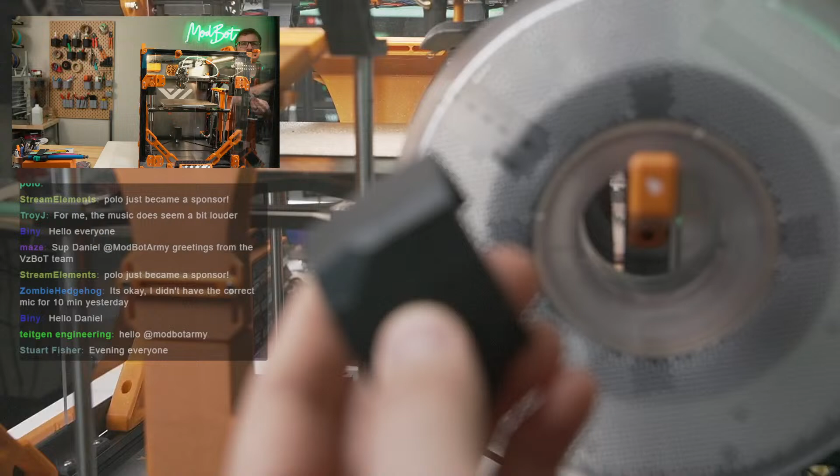Okay, so let's take a look at this. This is the worst model that I could find as far as showing this artifacting that's going on. Let me see how well we can see it. You guys can probably see it pretty bad right there. So I've been printing quite a bit with this VZBot, and a lot of times I don't really see much artifacting, but there's a few models I've printed where it's pretty bad. And this is, for anyone that doesn't know what this is, the Stealthburner, and it's the wing for the Stealthburner. I noticed this when we printed it out for the Trident that we just completed, because this is how the part looks on the Trident. It looks quite bad.

So I had a couple ideas of what it was. I think I've had some weird issues with Orca Slicer and the Arachne wall generator, so that's one thing I want to check. Steve, who is probably still in chat, mentioned also taking a look at Pressure Advance to see if there's something weird going on with it.

So the game plan is we're going to print 2 of these. I'm going to move that off, go ahead and reslice it exactly as is, and we're just going to remove the Arachne and go with classic wall generator and see what that does.

It was lovely meeting Steve Bills. Maybe next Rep Fest. Are you by chance going to any in the States next year? My current plan is still, if all works out, I'm really trying to go to Rocky Mountain and then 3D Printopia. We officially got our closing date for our house, which is super exciting, it's January 30th. So between January 30th and February at some point it's going to be a bit crazy, but we're still going to be here for like 30 days, there's a transition period. I'm hoping we can still maintain streaming on a much smaller scale, but I'll let everybody know as things get closer. We are super excited, it's going to be awesome, the streaming studio area is bigger, it's just going to be so cool.

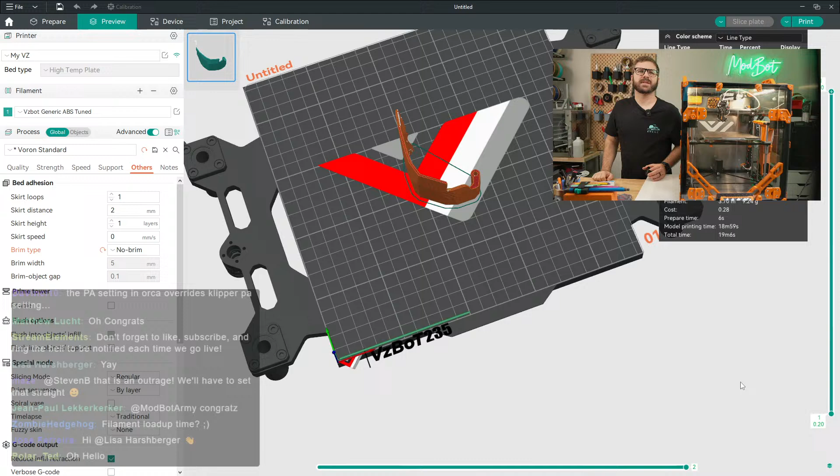Thank you very much, it's going to be super freaking cool, I seriously can't wait. You said, oh cool, okay, so you should be at Rocky Mountain. Awesome.

What does each peak of the artifacting measure? It could be caused by a tooth pulley, or belt tension? I don't think it's belt tension either. It's so consistent that to me it doesn't look like it's something caused by vibrations, because usually you'd see them sort of trail off.

So I don't want to change anything, I just want to change one parameter at a time. We're going to start off with leaving everything as is, but I'm going to change this wall generator from Arachne to classic, and then we're going to reslice it and print it and see what happens.

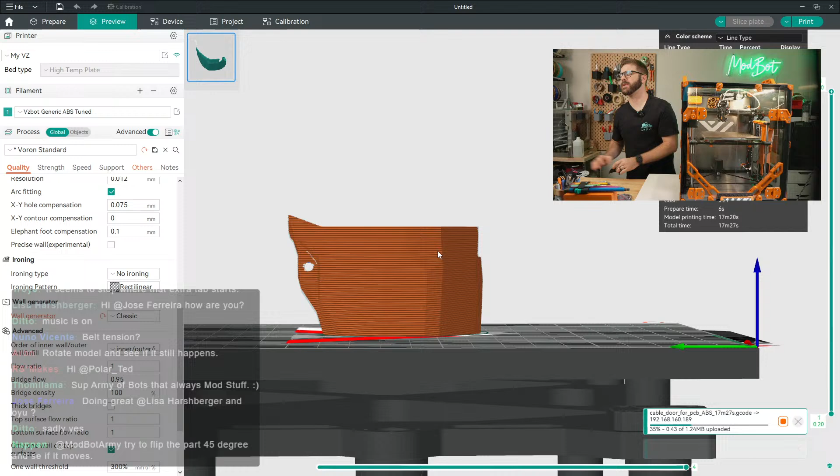And these parts are pretty quick, they're like 17 minutes. So we'll do this, and then we will reset the pressure advance and run a pressure advance test and see if that does it. And if that doesn't do it, then I am truly open to theories and ideas.

Let's see. Do you want to cut off some of that part for testing? That's not a terrible idea, we don't actually need the full thing, huh? Yeah, let's maybe do that. Let me see here, let's see if I can remember how to do it. I don't know if I've actually chopped a part in this slicer, I believe it's just a cut tool?

Support painting, cut, there we go. So I guess in theory, well, God, I can't say that this week because it was setting off people's...

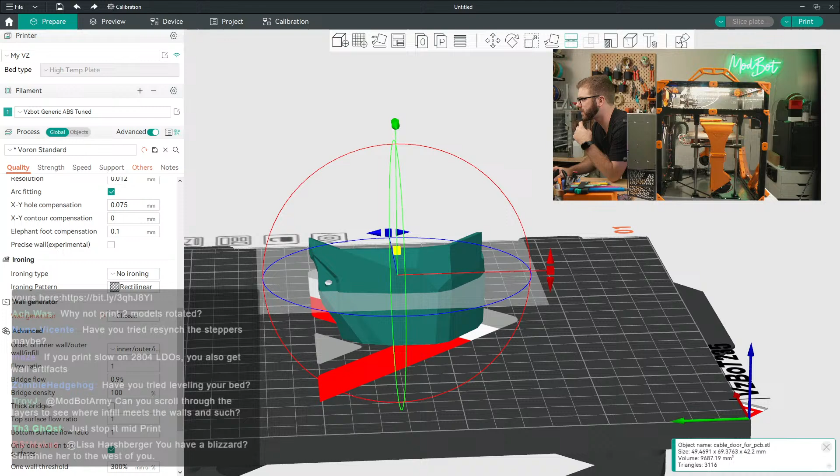Can you scroll down through the layers to where the infill meets the walls and such? There is no infill on this. So based off of where I'm seeing this artifact, half of this is probably plenty, so let's perform cut, let's get rid of the top portion.

Oops. Come on, there we go. Okay cool, that should make it, what, 10 minutes then? Yeah, 11 minutes, so that's faster.

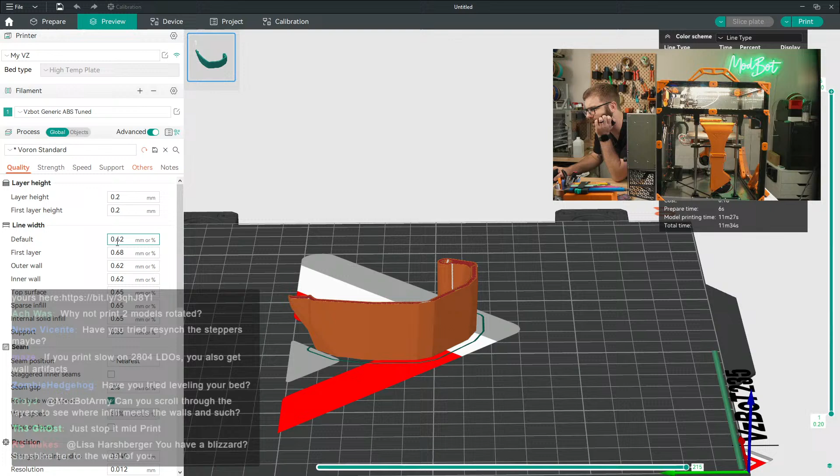Let me also make sure I didn't do anything silly, because we are running a 0.6 nozzle, so that's why the layer lines are wider, 0.62, 0.68, yada yada. Yeah, but there is no, well maybe is there some slight infill? I don't think so, because it's with the Voron settings, so because of how thin this part is, it should be solid walls.

I did try leveling the bed. Why not print 2 models rotated? What do you mean, just to see from a different angle how it looks? Doing well watching a blizzard happening?

Oh my gosh, I need to assemble my pile of Switchwire parts. What did you say? I missed some of these.

Try to flip the part 45 degrees and see if it moves. But the Voron setting is for 0.4. True.

I'm going to end up stopping this print then as soon as it starts here. It should be defaults, Maze. I'll take a look in 1 sec here. Let me see if I go pause.

Have you tried leveling your camera? Thanks, zombie.

Okay, stop, repair, print, upload. So speeds are normal printing's 10K accel, outer walls 5K, inner walls 10K.

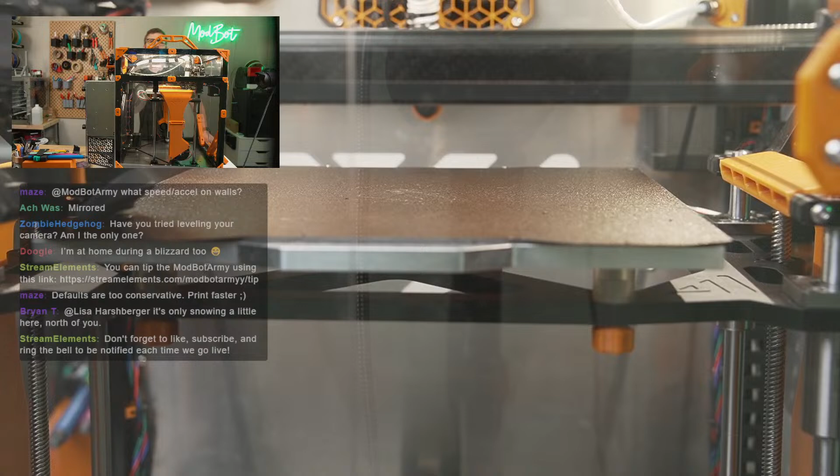If you got most artifacts on a 45, so if you rotate a 45, then it should move if it's mechanical.

I'm at home during a blizzard too.

The Orca Slicer profile was a contribution from one of our users. The speed accels in there are way too conservative. Like moderate accel for all-wheel drive should be 25. No shit.

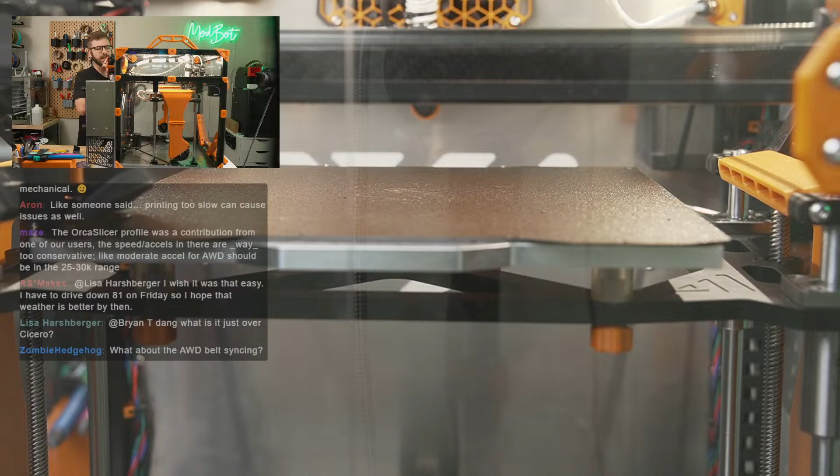I'm fine with bumping it. Let's just, for my own self, because I've had some weird stuff happen with Arachne. On my V0, when I was printing out the Voron test cube, I kept having this sort of strange hole in the wall, and it ended up being related to Arachne. So I just want to rule this out.

Yeah, one change at a time. So let's see, this is just a half print, it's a quick 10 minutes, and if it's not looking substantially better, then we can try something else out.

I probably should have done a... Ooh, that skipped a step. That immediately skipped a step.

And that's funny because I just talked to Steve about this. I haven't had any issues with skipped steps on this. It like immediately skipped a step.

Ah! I did the wrong way. That's interesting.

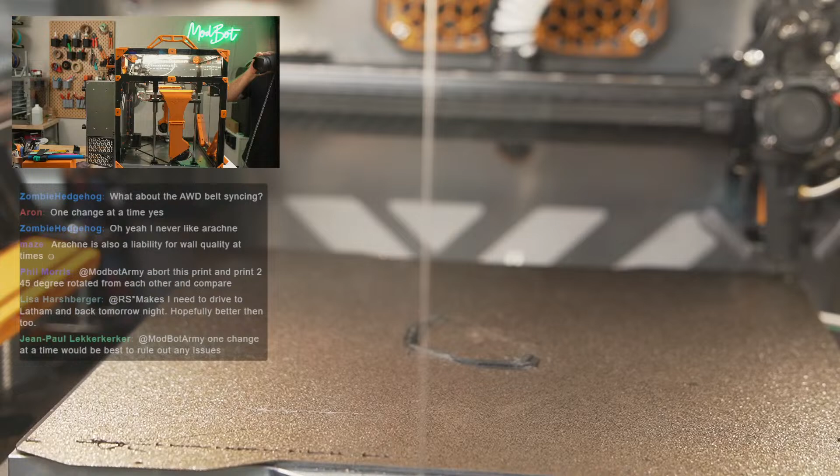I don't think it's too close to the bed. It's been the same settings for quite a long time, and it does preheat before it does the...

I am kind of curious though if we rotate the parts like someone mentioned, so print 2 of them at the same time.

Yeah, I printed quite a few parts on this printer, like for the 2.4, the Trident builds, and I have not had a skipped step. It's kind of funny because I was just talking to Steve about the settings for the stepper drivers just the other day because of skip steps, and then it skips a step.

That was not a benchy. It was not a benchy. Okay, I'm gonna try it actually. I lied, I'm gonna try it one more time just with a single one.

I'm not against rotating the part after, but I just want to see. I just want to see if I jinxed it, yeah, Steve.

Yeah, it hasn't even been like 48 hours. I think the VZBot heard us talking about it.

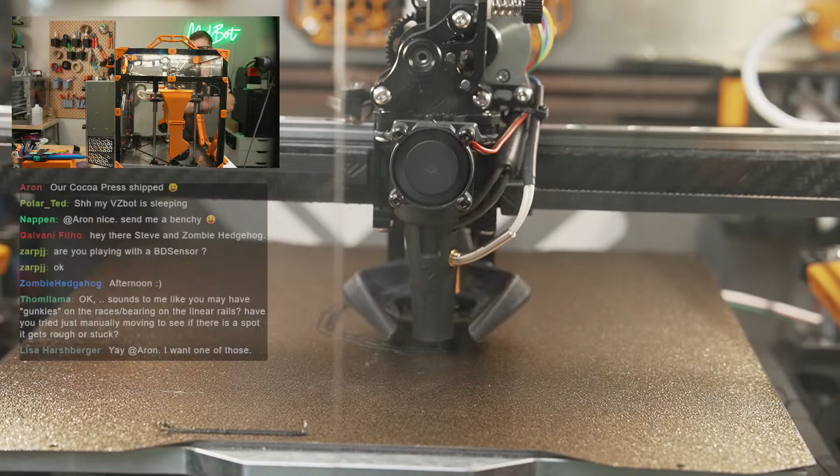Okay, well, it got beyond. It got me on the part where it skipped a second ago, so that's good.

It sounds to me like you have gunkies on the races bearings on the linear rails. Have you tried just manually moving them to see if the spot gets stuck? Yeah, yep.

Yeah, there's gonna be an ad in 10 minutes. The thing I just clicked, I thought it was gonna turn off ads, but it looks like it set a 10-minute timer instead. So there will be an ad in 10 minutes, sorry.

Yeah, they changed some stuff recently, but I thought it was for VODs, for after a stream was done. I don't think it would have done that, I think if you have premium you're not gonna get ads. I'm hoping they add a gifted membership, like Twitch has a Prime membership, like a premium membership, but they will not allow creators to stop ads.

And I would say it's not - let's see. I would say it's not because of Arachne versus Classic. If you compare up here to there, I would say that looks identical. So we can rule out that it's the wall generator.

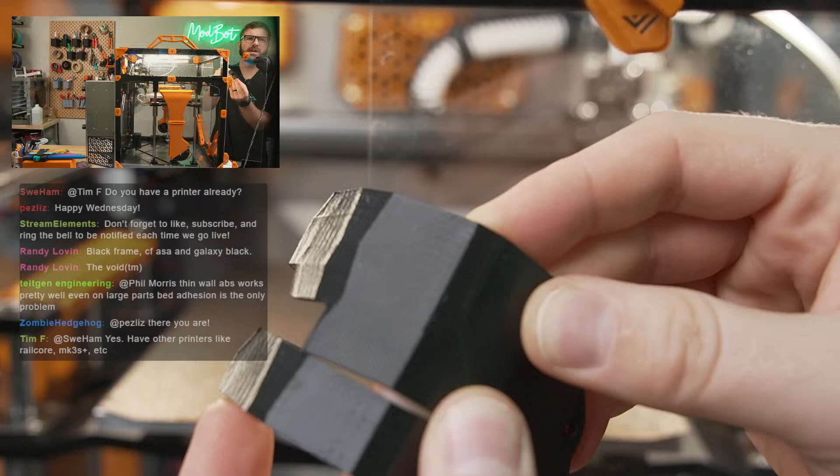Okay, so we're going to, let me close this to not let all of our hot air out. Pull this off.

Is it possible it's from the extruder gears? No, I don't think it would be the extruder gears. At least I don't see it. That's not what I think it is.

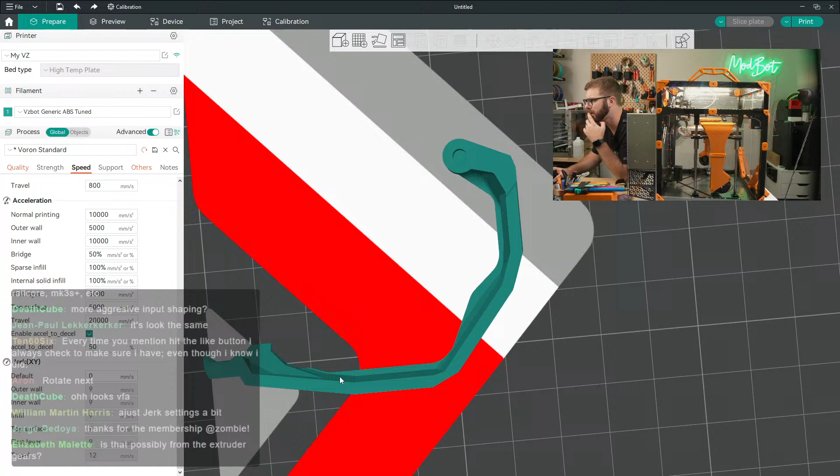Okay, so let's take this part and just flip it around. This is the front of the printer. Let's do a little rotate. Nope, that's not what I want to do. Rotate, and we'll do...

Do 180 or 45? 180 might put us... 45 is probably best. Actually, okay, let's go back to where we were a second ago.

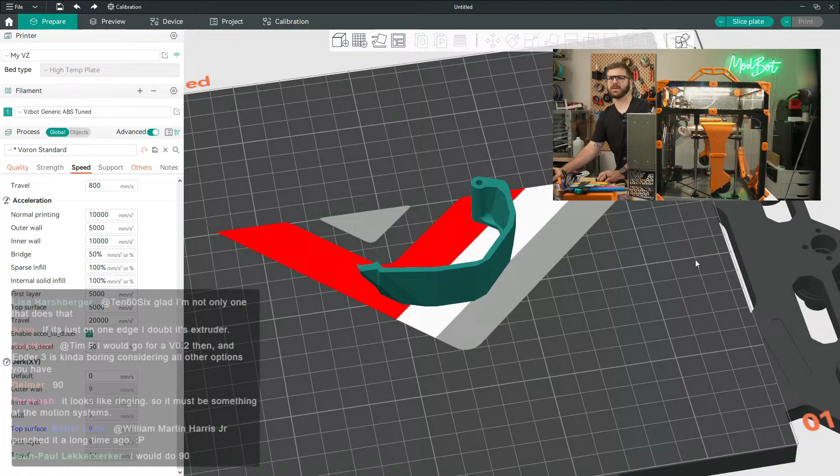Control Z. You think 90? It looks like ringing, so it must be something with the motion system. I would do 90. Yeah, let's try 90.

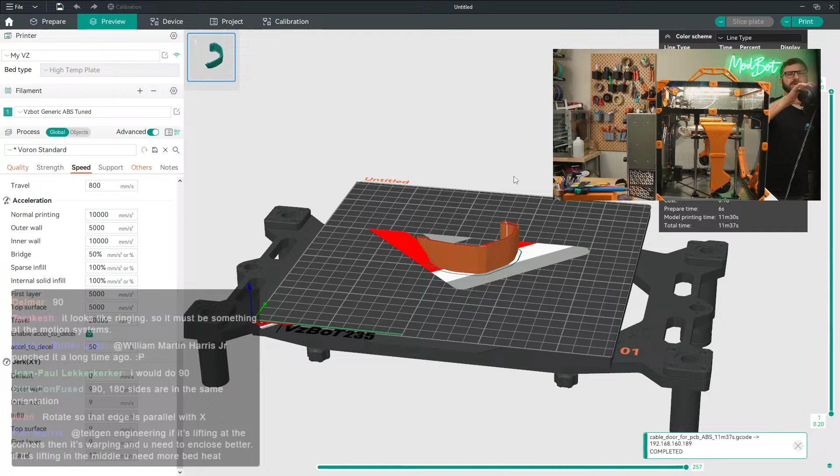We could certainly play around with input shaping. So I know that when Steve and I ran it, let's get this printing. When Steve and I ran the input shaping, we were told that because of the rigidity of this machine and the accelerations it hit, the default input shaping test wouldn't hit the max it could. So I never reran it. That being said, Steve's not having these issues, so I'm not entirely convinced that's the issue, but I'm fine with running input shaping again to see if that does anything.

The edge with the issue was at a 45-degree prior. The edge with the issue is this edge. Yeah, it was at 45 degrees, so 90 is probably not good.

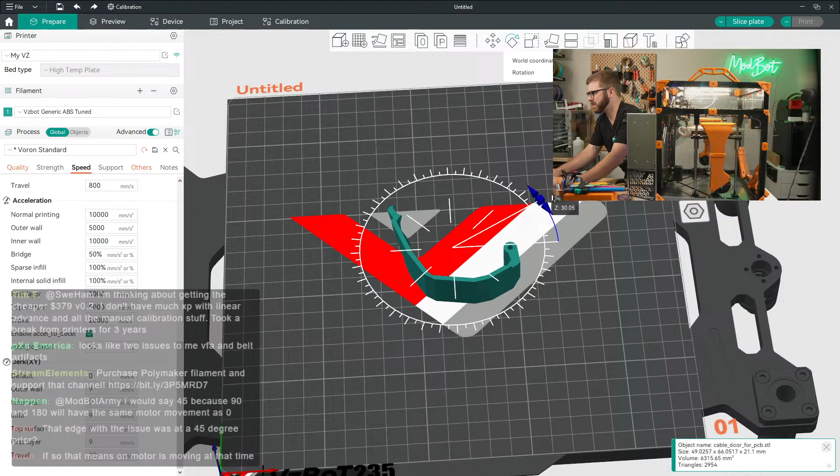Yeah, Aaron, I think you're right. All right, so this is how it was before, and this is the main piece where we're seeing the issue. So let's manually rotate it and try to get it as parallel to X as possible.

That's pretty close. So if all of a sudden this is looking a lot better and this is looking a lot worse, then... yeah. I've only printed carbon fiber filament on the VZBot so far, so...

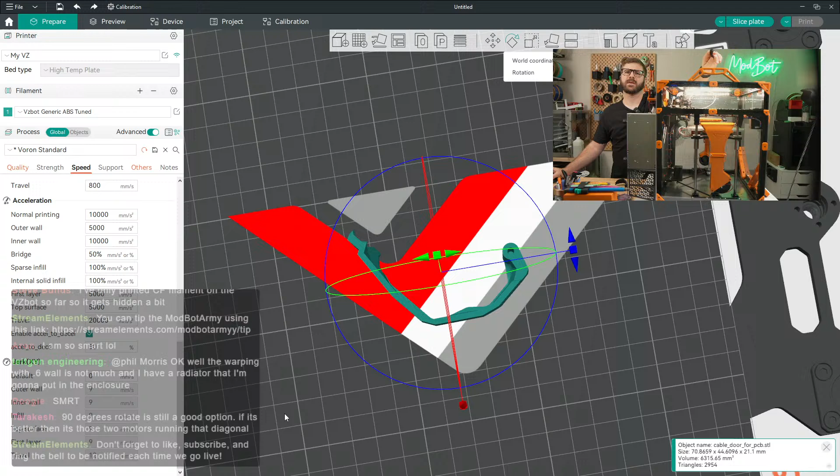Okay, so let's try this, see how this looks.

So in your... I believe what Maze is saying is also true. Gotcha, okay, so let's see what happens here, Maze, and if you're thinking we need to bump the accels, we can bump accels and see if that does it as well.

Belts are bouncing? I don't know what you mean.

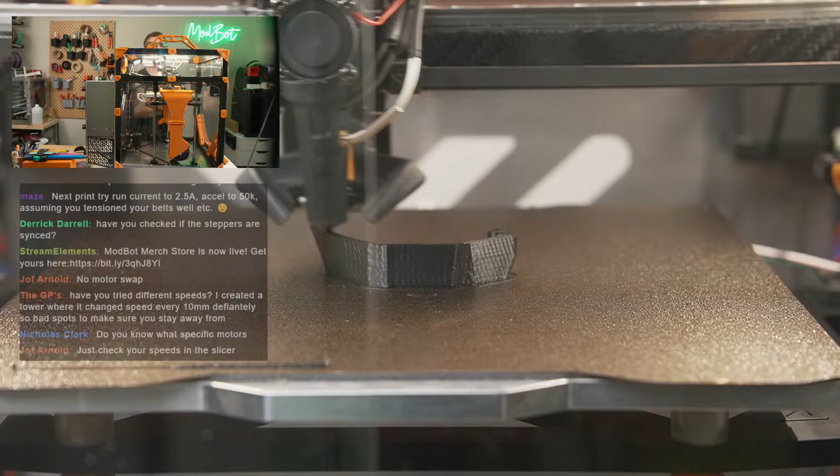Yeah, I'm gonna go with what Maze says. Maze knows this printer like the back of his hand, so we'll try that and see if we see any improvements.

Okay, let's stop the print. It's probably almost done, but we'll get it. Device pause. Okay, so print stopped.

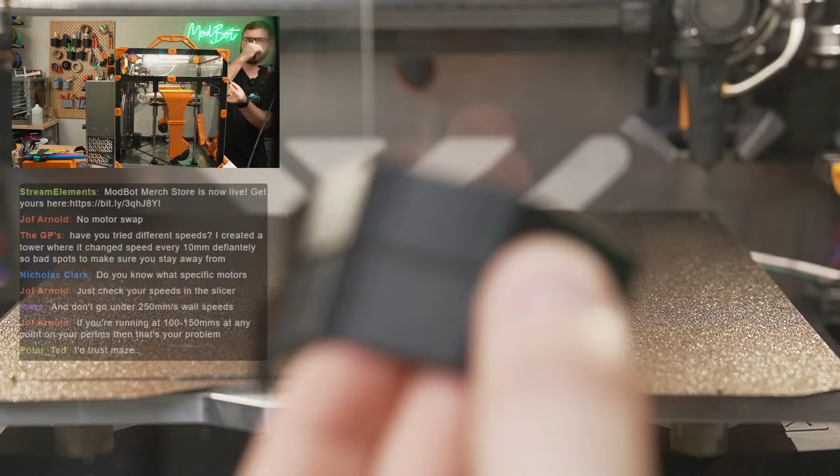Definitely shifted. So let me see if you guys can see this. This is the one I just got off the printer on top, and it certainly changed the pattern. There's still a pattern, but it slightly changed, not a whole lot. I guess the pattern's still really there.

So let's do this next thing and see how that does. Okay, so Maze is saying, what do I have it capped at in firmware?

Max accel is capped at 10K in firmware. Interesting. Accel to 50K, alright, we're gonna try it.

Save and close. Oh wait, you said printer CFG. So you're saying to change the current to 2.5 amps? So we are at 1.9, we'll go to 2.5.

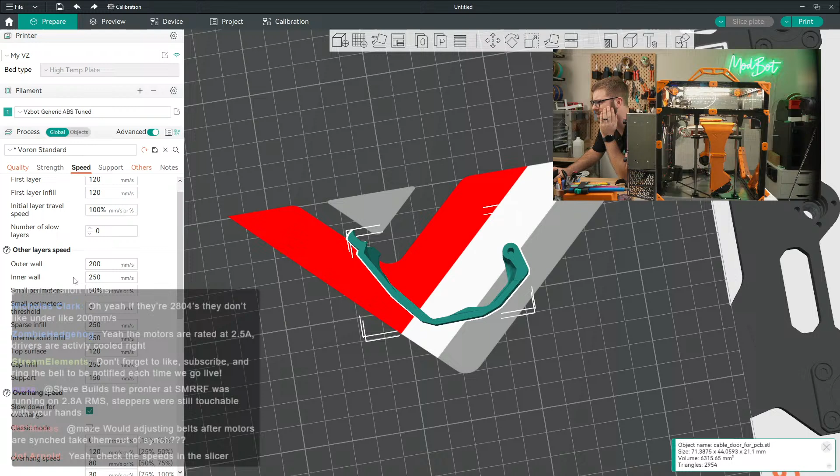Okay, speeds in the slicer. So we've got, where are we at? Outer wall 200, inner wall 250. So what are you thinking we should set this to?

You thinking 50k for everything other than first layer, or? I mean, check the sliced view, slice, then select speed from the drop down. Oh, you're saying what it's actually hitting. Gotcha. Preview, line type, speed.

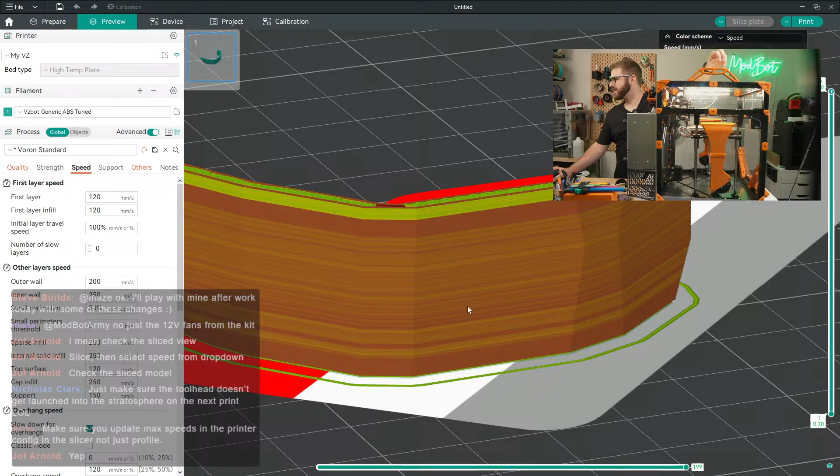So anywhere between, why is there - that's interesting to me that some direction on the outer wall shows slower speeds while some shows quicker speeds.

Hey Sven, hey Jof, make sure you update max speeds in the printer config. Yeah, yep. Wait, make sure you update max speeds in the printer config, not just- gotcha.

Oh, minimum layer time could be it. Let's see, so let's go to max volumetric.

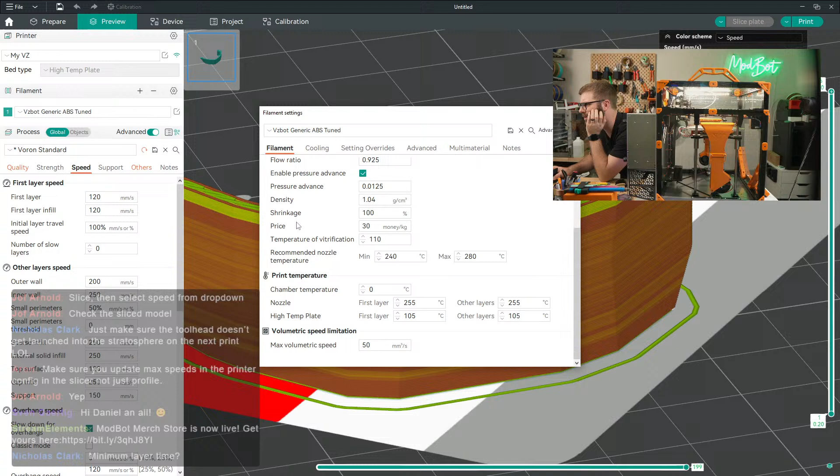50k accel, you can slow down a bit on the outer walls, 250 wall speed. You're saying 50k across the board? Also, I don't know...

Edit my VZ. Oh, I didn't, no. Printable area, motion ability, maximum X speed, Y speed, max accel X 50k, 50k. It looks like it's already set to 50k in the slicer by default, so I think we're good there.

Okay, gotta head back to work. Looking forward to hearing how the rest of this goes. You and me both, Steve.

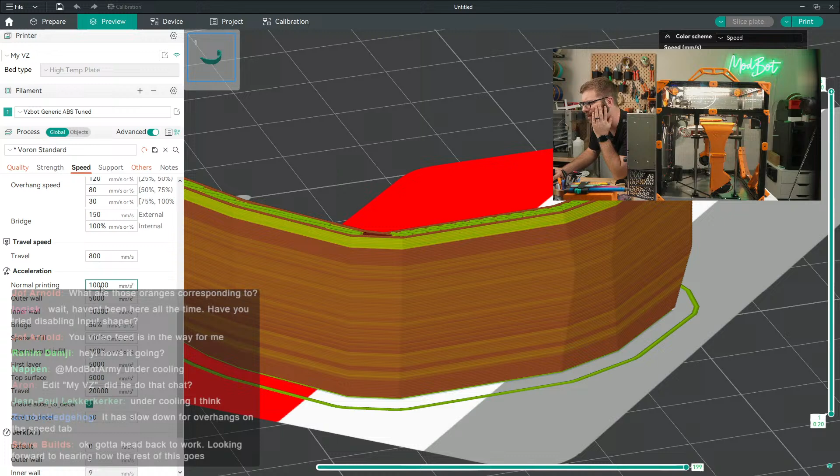It'll just slow down for overhangs speed, Steve. Okay, let's do one thing at a time, so let's do 50k. Are you thinking 50k for everything?

Orange looks like it's... so orange is faster than yellow as far as if we're going by color. Oops, shit, I didn't mean to do that. Orange was about 170. Perhaps run a test speed on those settings prior to printing, or just ace it.

Yeah, I'm tempted to not go quite so fast right then. Like, should we start with just doubling things? So normal printing 20k, outer wall 10k, inner wall 20k.

I don't know if I want to just full send it without slowly ramping up. 300mm outer wall. Yeah, let's— it's a quick one. Let's do this, let's just double things.

20K, 20K, first layer 10K. I'm fine with first layer being like that, top layer as well I'm fine with. 50 flat, 25K outer wall? Really? Okay, I'm gonna meet you in the middle, we'll do 30K and we'll do 15K.

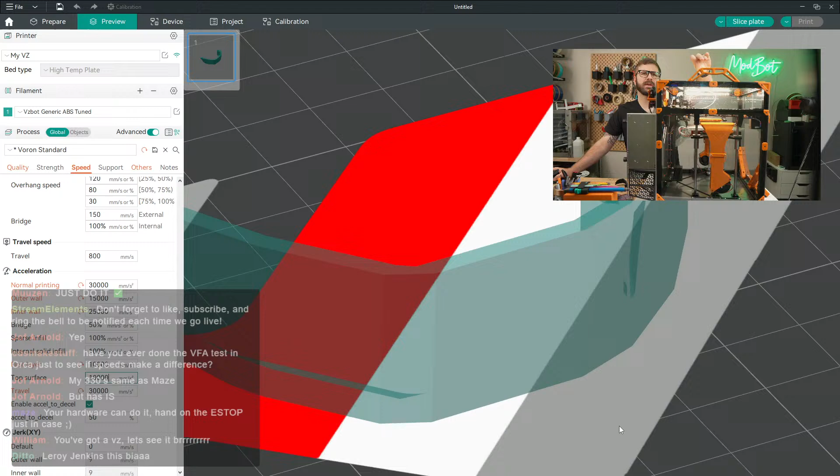My 330 is same as Maze's, but it has input shaper. Hardware can do it. Hand on the e-stop just in case. Okay.

Speed-wise, you're saying I'm fine with first layer, let's not touch. Outer wall, what should we try, 250s or 300? My palms are all getting sweaty. Is your speed—I haven't got anywhere near this before. I mean, we built this to do stuff like this. 250 outer wall, okay. 250 outer, and then you said 300 for the rest?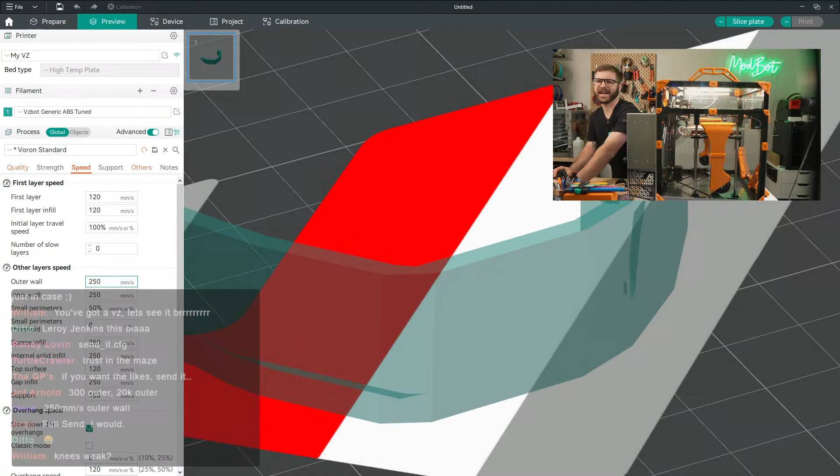This is a— geez, I can't talk. 235. I'm going with what Maze says mostly.

300 to 500 rest, whatever you feel comfortable with, buddy. Okay, all right, all right. You said outer there, so we'll do 350. We'll bump things up to 350. Sparse infill 350, 350, 350. Support we're leaving. Gap infill will bump up as well, and top surface will leave. Top surface will bump up to 200 at least.

Just double what Maze says. He's probably being conservative. Okay.

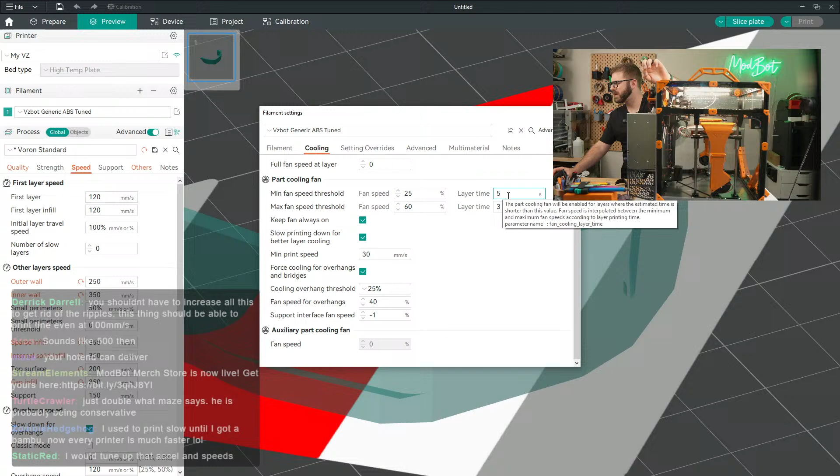The other thing, we probably need to do some stuff with cooling, right? Because cooling is going to be our limiting factor. This is going to be under here. Cooling—no cooling for first layers, full speed at later layers. Okay, minimum fan threshold 25%. Does 0 disable it? 0 disables it, right?

I would tune up the acceleration and speeds. Or we can just drop it down with 3-second layer times and 1-second layer times and see if that does it. I mean, that will boost us.

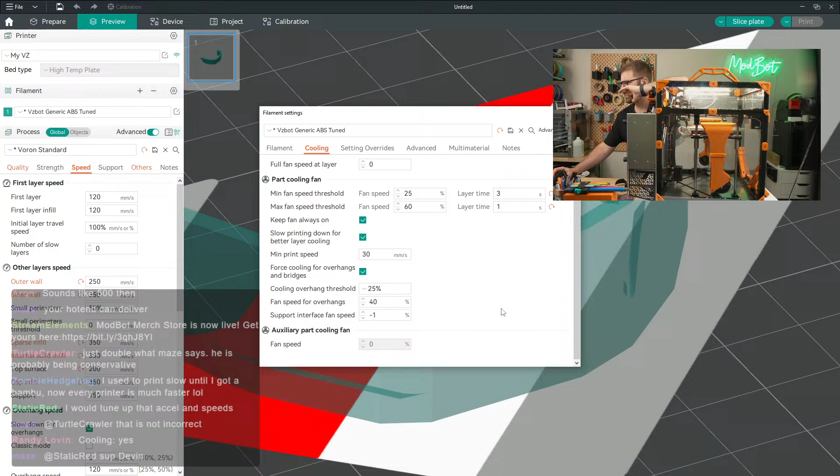Yeah, this is definitely faster. The outside wall is solid, which is good. We've got a single color, which I don't know if whatever it was doing before with the cooling down potentially was having an effect on it. If it goes wrong, we'll know what your next stream will be named.

Print time—yeah, let's just do it. What's the speed, or what's the time going to take on this? 7 minutes and 34 seconds. All right.

Mouse is on the emergency stop button. Whew.

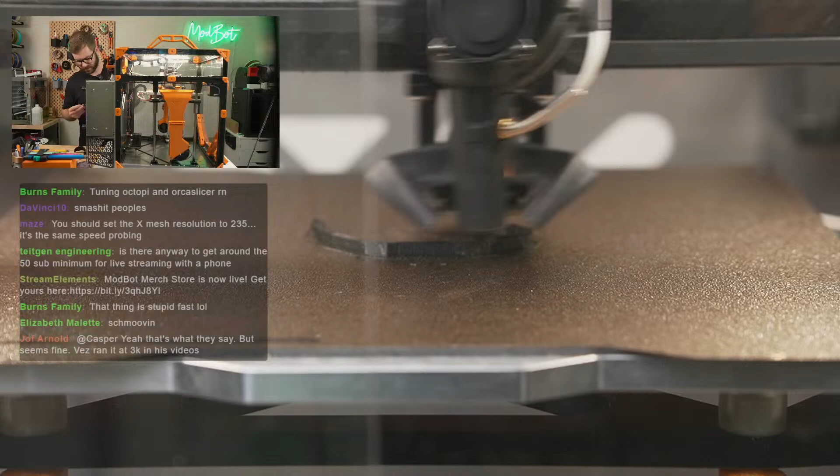It'll be interesting to compare this and see if there's improvements. You think speed it up? All right, I'll go 150. I'll go 150, Maze. All right. This is 150%, it still feels like it's got more to go. We'll go 200%.

God, the travel speed is gross. You can't even really—I mean, it moves so fast that it just almost teleports. The flow rate is—where are we, flow rate? 33 to, roughly, a lot of it's around 40 cubic millimeters a second. It's dropping between like low 30s and 50, but average is around 40, cubic.

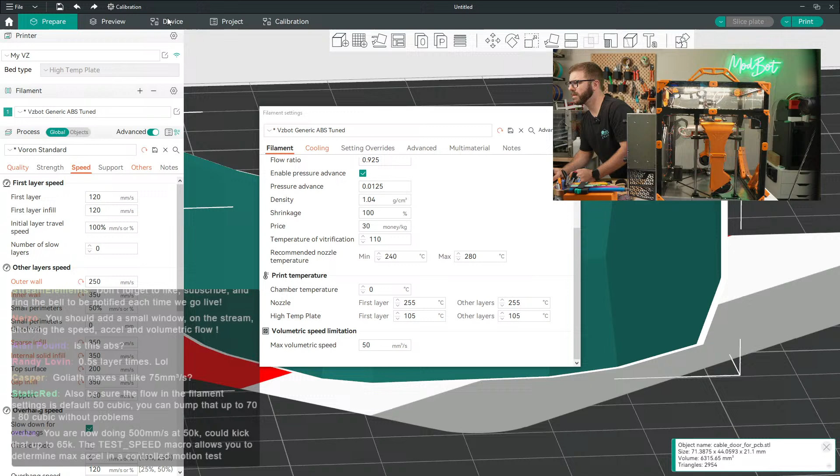Modbot, mind sharing the mainsail screen for a moment? Yeah, sure. Device, oops, nope. I don't know how well you can see that.

You are now doing 500 millimeters a second at 50K. Could kick that up to 65K. I'm not doing 50K, Maze, I never set it to 50. It's at 30K right now.

As far as I'm aware it won't go past. Or wait, no, I think when you adjust speed factor, it doesn't adjust your accels that you set in slicer, right? I think it overrides it. I'm pretty sure slicer overrides it. No, not slicer in browser. Browser in slicer with Orca. Yeah, speed multiplier doesn't affect accels.

So do you think we should bump accels? Okay, so let's compare.

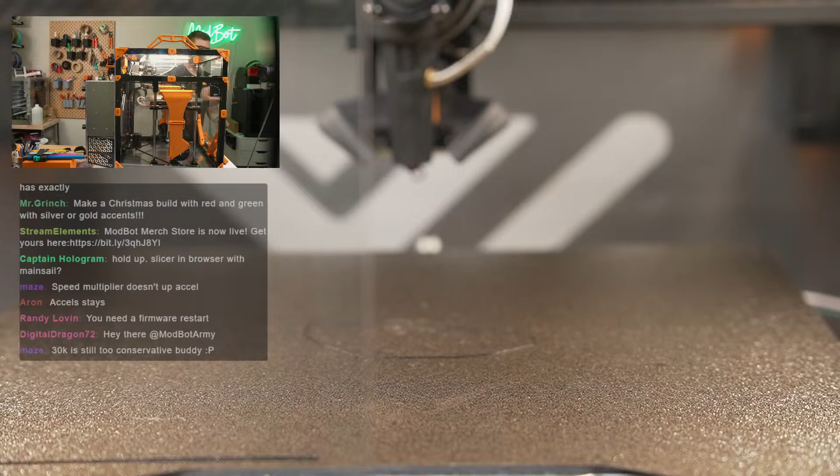Okay, so top is from before, bottom is from after. Definitely still there, it's moved around a bit, but it's still relatively similar.

Okay, we'll bump it up. I wanted to baby step it, not go crazy. We'll do 50, we're doing 50K accel now.

Okay, isn't the max accel 10K? No, wait a minute. No, I don't think so, I had restarted it. It should be set... printer.cfg, I thought I bumped it. Yeah, I did, I bumped it to 50K. So it's not a firmware limitation, it's a slicer limitation, and it's down here. So normal printing will bump to... the outer wall was actually only at 15K, Maze.

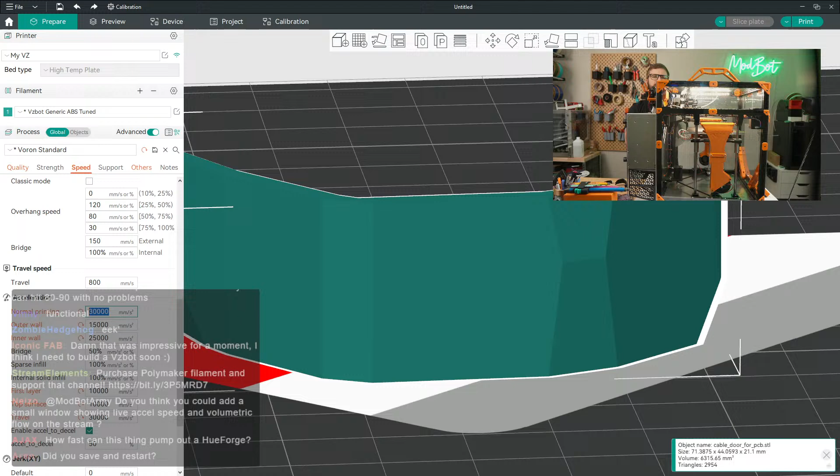Do you think you can add a small window showing live accels and speeds? I probably can, I don't think I can do it right now. Did you save and restart? I think I did, Aron. We can, well, let's do it. Let's restart the printer just to be sure, let's do a firmware restart, and make sure it's still good.

Yeah, we're good, we're good on the accels. I think I saw it in mainsail also bumping up faster. So let's do, for normal we'll do 50 for that. But this is pretty much all outer walls, so we'll bump outer walls to 30, inner walls to 35, and then want this to 20.

20. I'm scared for Beacon, dude, at those travel speeds. That's how I display on live streams.

Load mainsail in OBS as a browser source. Oh, that's not a bad idea. Okay. Let's see, oh, it's a browser source. That's not a bad idea. Okay, yeah, if we want, I could take a minute and do that.

One sec, hey BBs. Hi, we're doing crazy stuff. Yeah. What? Okay, with a little ice and a little cream. Thank you.

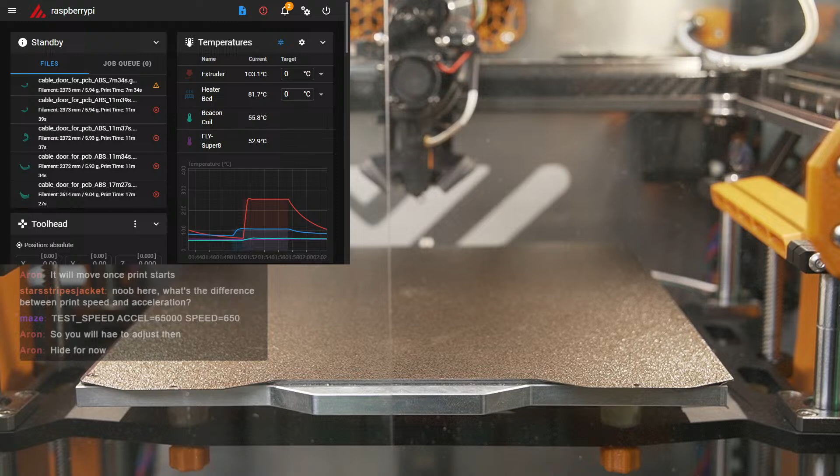It will move once the print starts, so you'll have to adjust. Let me just set this to 1920 by 1080 so it's correct. What are you guys seeing right now? You're seeing mainsail, right?

I don't remember, is this crop or is it going to shrink the whole window size? Nope, it's shrinking the whole window. Impact, screen share, full screen property, show transition, scale filtering. Why can't I see crop? Transform, that's gotta be it, right? Edit, transform. Nope. Can you not crop with bars? Do you have to crop using this box? Hold Alt and drag top to bottom, sides close.

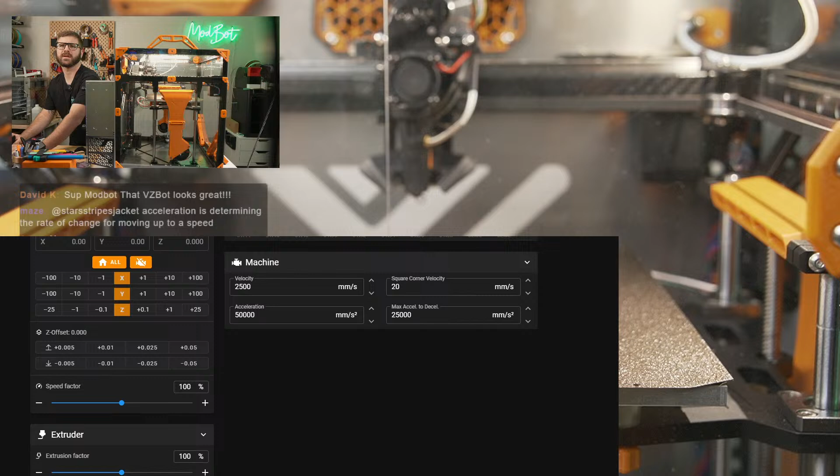Oh, sick, okay. So you guys want to see roughly this? Maybe up here?

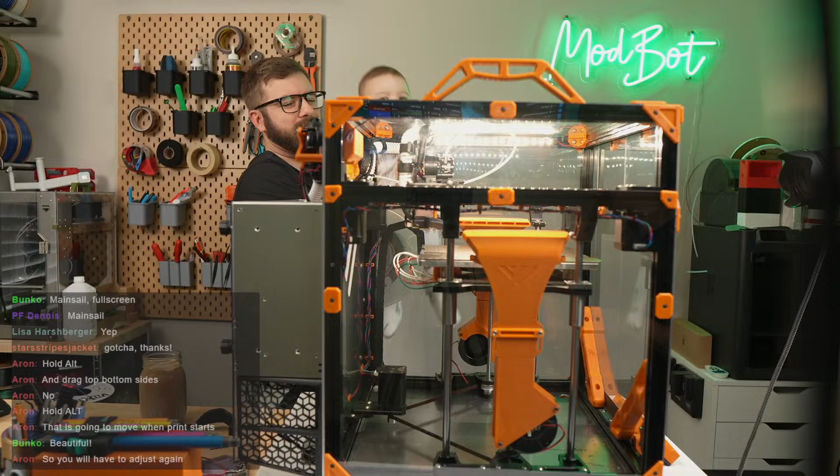Okay, let's get this print going. Hi, all right, Jack's gonna give us good luck. We're taking a quick Jack break, he's gonna give us good luck with our VZ. Come here, dude. Can you? Oh whoa, he likes watching the 3D printers.

Hold on, all right, so we are going at really quick speeds today, and we need you to wish us good luck please. We're basically trying to get rid of, if you didn't see it, this artifacting, and we're trying to figure out how to get rid of it. We've tried a slicer setting, and now we're just cranking up speeds to see if it has something to do with the driver and the motors.

Hold on, Jack says hi. He's hidden behind the VZBot. Yeah, it's a pretty big printer, huh? Yeah, okay, I love you dude.

Okay, let's do this. Sorry, yeah, he's 9.5 months. We'll have his official 9-month checkup Monday, but he was 9 months on the 5th. It's gonna be really interesting to see how tall and how heavy he is, because he feels really heavy.

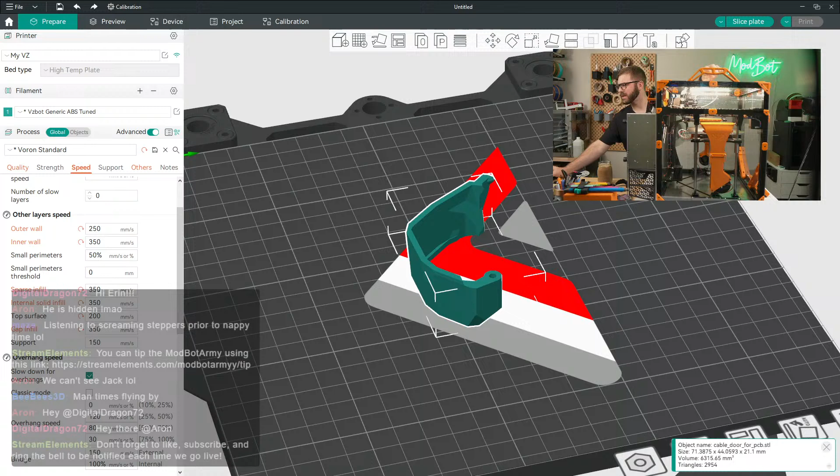Okay, wish us luck. We're gonna go fast. So Maze, I adjusted all of the accels. You thinking keep the layer speeds? Yeah, let's keep layer speeds the same. Let's run with this, I'm gonna have my hand on the emergency stop.

You can watch, you should watch it a sec when it goes on. I know you see it from out there, but it's pretty crazy. Hold on, all right, here we go. Do I need to adjust cropping, or can you see? I think I need to adjust the cropping, don't I?

Try this macro, test speed, accel. Is the test speed macro what basically has the tool head go to the center and then do the perimeter and X pattern? Yeah, it's been that long, Ted. It's been that long, man.

Is Bambu one of the best 3D printers to get starting out? It totally depends on your goals. Well, what did people want to see? Did they want to see the accels, or... it helps you in validating max accels.

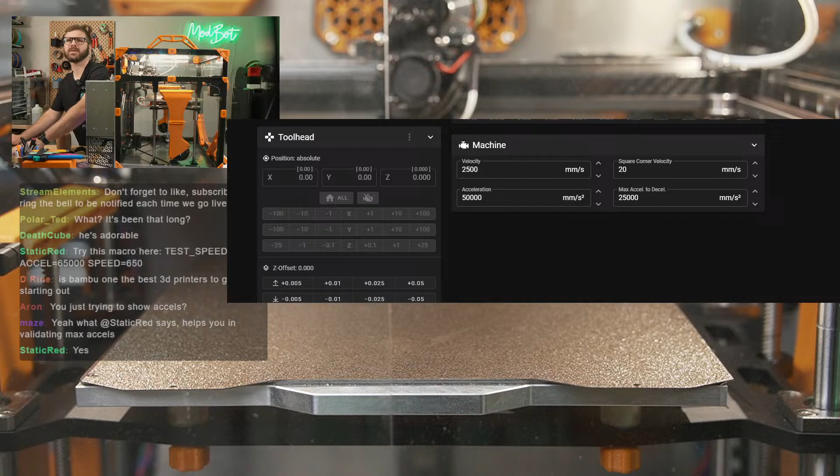Okay, let me see if I go. I wouldn't get him so close just in case - it's moving fast, the tool head, and it's metal, like just in case.

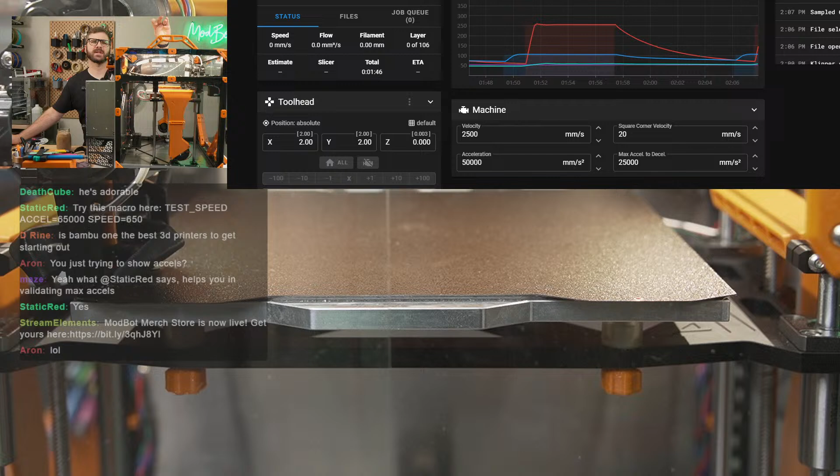If test speed goes fine, you can be relatively certain that it will hit those speeds during printing, as it's single motor stress testing, diagonal moves. Gotcha, okay. I have not used test speed. I'm sure I'll start using it when testing things out.

I might need to move this around a little bit. Also, let me try to be a little bit more... oops, that's not what I wanted to do. That is what I wanted to do.

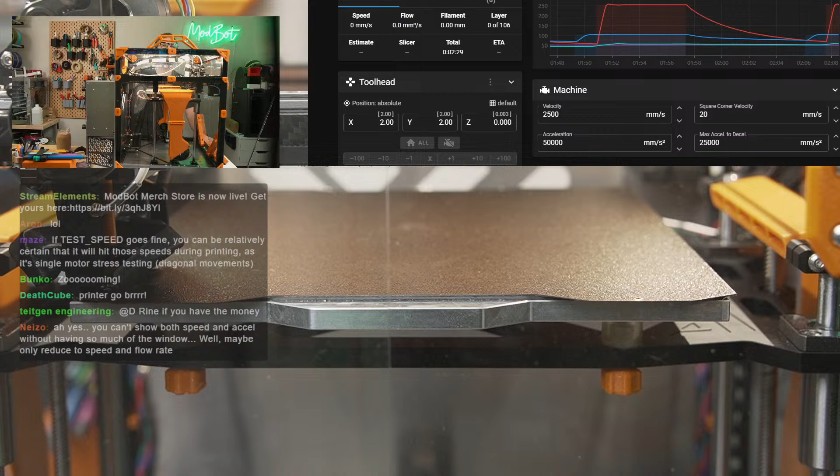How's that, does that work? Oh yes, you can't show both speeds and accels without taking up too much of the window. Well, maybe reduce to only speed. Yeah, it takes up a lot of the window. That's true, I guess if I cropped them as two separate windows.

I think I'm going to remove - hold on, let me watch this first layer. I think the nozzle's gonna bump. Maybe not.

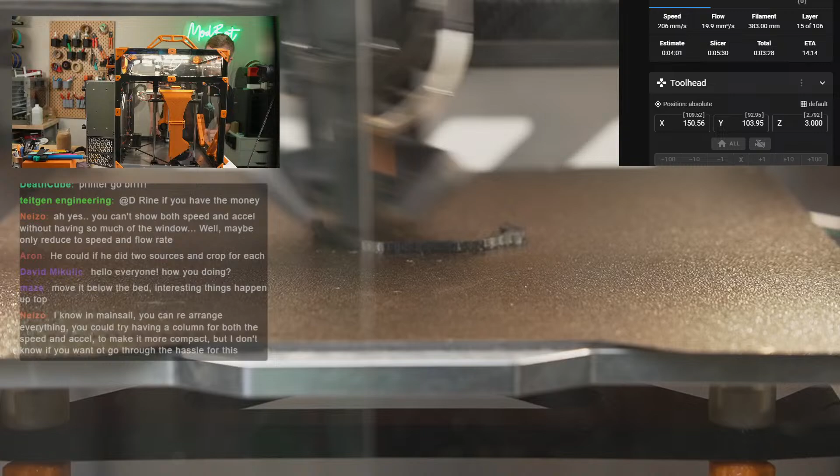My monitor is shaking.

I'm still going to have to look into the artifacts, because I'm still seeing them even at these accelerations and speeds. So I don't know exactly what it is.

I think it's an RTX 2060 in here, so it has that NVIDIA noise cancellation. It's stupid impressive. It's not quiet in here.

What's the loudest? This or the X1 before the latest patch? This is louder, definitely louder than the X1. Main sounds coming off this are the CPAP, and then motion is not quiet either.

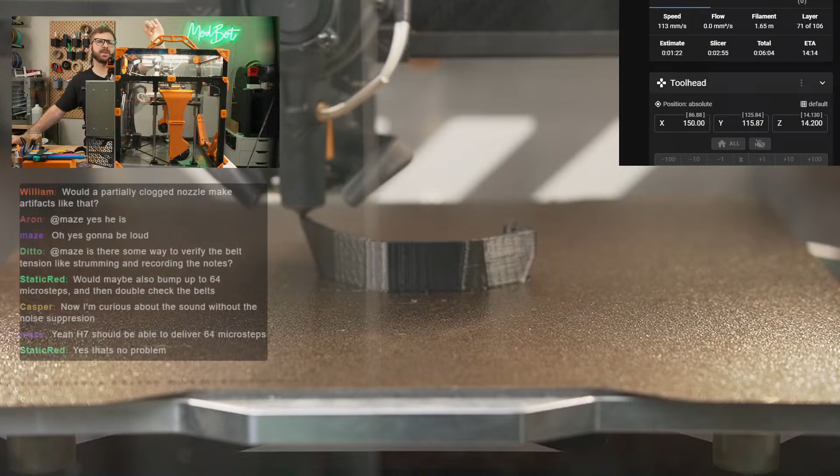Oh, I can turn off noise suppression for you guys. Let me see, one sec. Rode wireless go, filters, noise suppression. Should be off.

It's not, is it super loud? I don't know, I've been standing in this room. You can hear it now, right? There's the motion and the CPAP.

Yeah, I mean, it's loud. Don't get me wrong, if I was trying to focus on something and this was running next to me, I'd lose my mind. Yeah, exactly, it's definitely loud, but it's not bad considering just how fast it's going.

I agree with that. Putting the filter back on though.

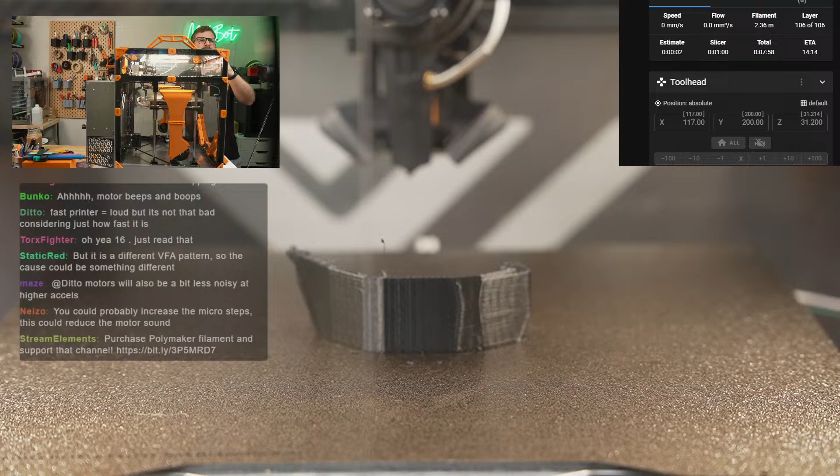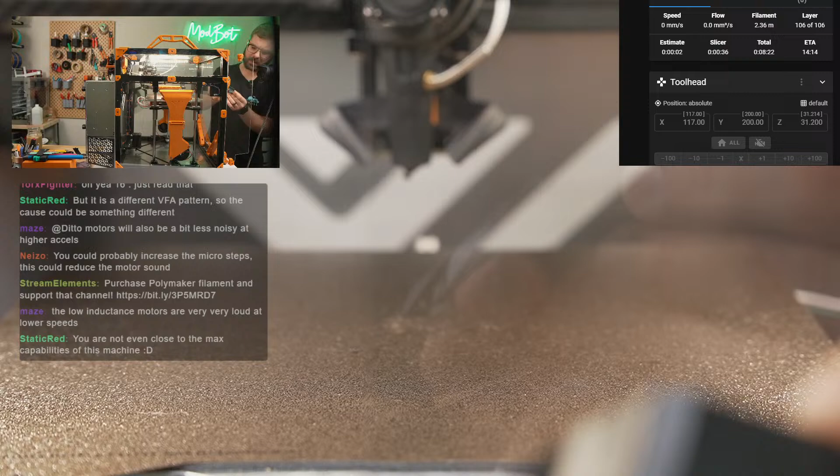Wow. Let me grab, where's the last piece we did? Yeah, I don't know if that's improving it. It looks real similar.

There's some. So on the top piece, it's way more kind of consistent like we've been seeing, while on the bottom piece, there's some more defined vibrations here.

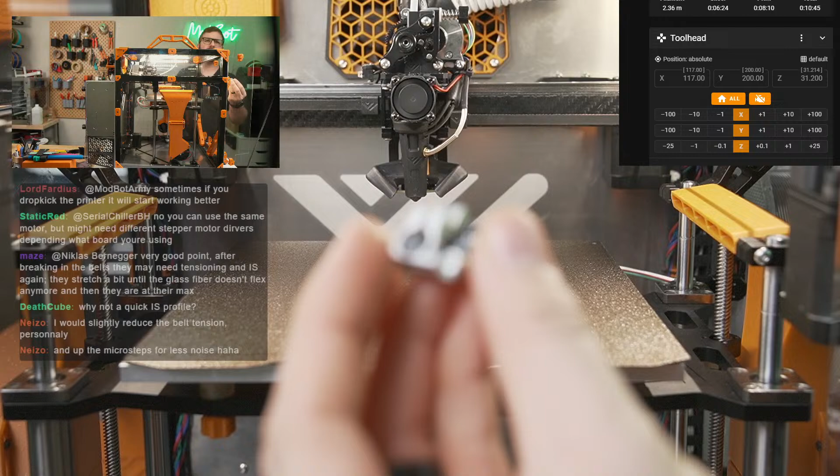Yeah, let me see. Okay, so this is the little input shaper that I'd use that sits on the Goliath. I don't think I have to take off the silicone sock. We'll see, I think it just pops on basically, and then I tension it.

Reducing belt tension might add some dampening, could smooth things out.

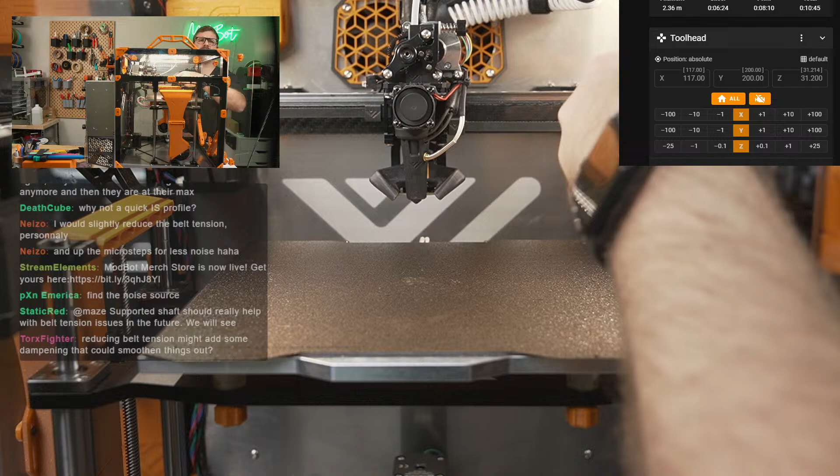Orca has a VFA test you could try. Okay, so the things we could try, based on feedback we're getting here, is: 1, try loosening belts a little bit. 2, belts have already stretched a little bit, so the input shaping values from the original input shaping test might not be enough. It has printed a fair bit since the beginning.

I know, right? So that's 2. 3 was reseat everything on the motors. 4 was adjust the micro steps. 5 was, there's a channel out there that was super in depth with these lines, and their finding was one issue is motor design and bad belt tension despite accurate frequency.

Well, I think the easiest thing to do, I'm tempted to do input shaping real quick, just because I haven't done input shaping with the full frequencies needed or recommended for this. Let me see, let me really quickly see here.

I think in the VZBot Discord, I was given the recommendation. It's, in my opinion, not a tension issue, that only alters the result more or less pronounced. Speed changes the angle. It's an imprint on the teeth bouncing.

Okay, before I go back into this, I'm trying to think about how I can do this as far as helping pick colors, have everyone help pick colors, because we're going to be building an Enderwire. I need to start printing out the colors ASAP. This whole wall on the left side is ABS. I definitely have more ABS colors, but I think there's plenty up here for us to be able to hopefully decide.

So the only thing you can't really see is that the bottom right is a galaxy color, so it's got sparkles in it. Everything else is non-glittery, just like a color, no added stuff. I'm thinking we'll first start off by voting on a primary color, and then we'll do the accent color. I just don't know how to go about it because I can't make a poll with all of these. So I'm wondering if we go one row at a time, do this row and this row, and then take the 3 winners and put them against each other for the first vote.

Okay, so the galaxy is nice, I have a lot more galaxy. Let me add one last color to the pile. Okay, this has got to be galaxy as well. So we have a galaxy, we're adding this one, this is the 2 galaxy ones I'm having as an option. This is galaxy teal, which is a really subtle galaxy. So the only 2 ones with glitter are the bottom right.

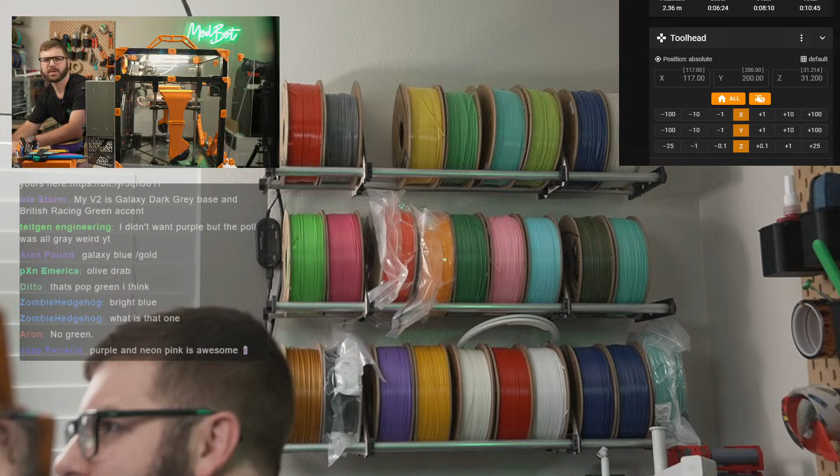Okay, so we'll do light blue, light pink, neon green. Let's pull it up. Okay, so we'll go light blue, light pink, neon green, and neon pink.

Row 2. Okay, row 2 started. Also, I can put this up here just for a brief second, so you can see what it would maybe look like if one of these was an accent to purple. I don't know if you can see it, is my big head in the way? Yeah, kind of, moving my head out of the way. That's all I got. Okay, moving back.

So it's done with installing that. Then install the Shake and Tune package by running over SSH on your printer, which we are.

I use my favorite colors for Everest, black and black.

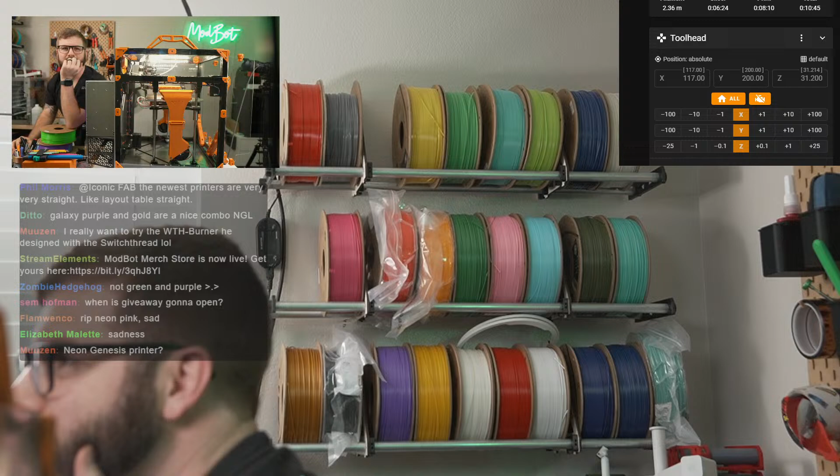Yeah, we're only taking the top one from each row. Okay, so let's do row 3. Row 3, we've got - what did I say? We've got gold, we've got yellow, we've got galaxy teal, galaxy teal, and galaxy blue.

Start poll. Okay, no white. White didn't get voted on. Oh, white is down there. I did white on the Mercury 1.1 and the white parts broke apart easier, so I'm gonna avoid white.

They didn't really break apart easier. There was one part that broke. I'm exaggerating a little bit, but yeah, no. Damn, white.

That means you won't have Galaxy on Galaxy. Yeah, it won't, Galaxy on Galaxy is not going to be an option. We have to at least use one of the non-Galaxy colors. It's still downloading the thing.

Google EVA 01, use that color scheme. EVA 01.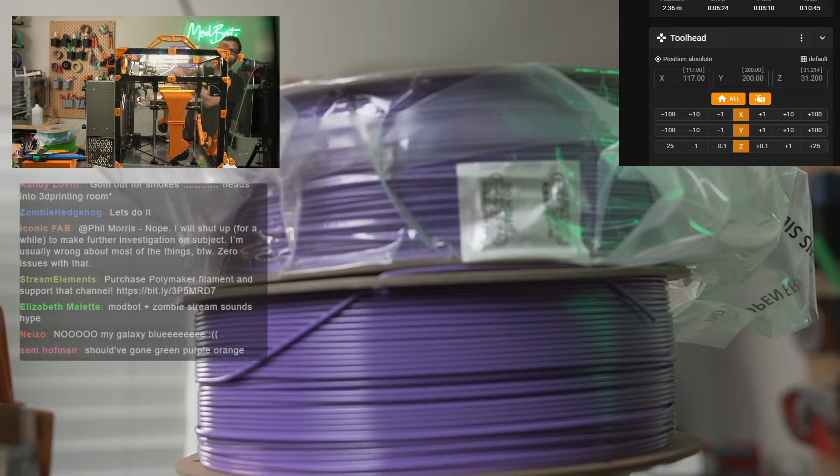But the thing I want to decide is, out of the purples - I said, and I'm clearly being held to what I said by Elizabeth, is that we could choose between. Okay, let me crack this open, hold on. You can't see the glitter through it, so let's tear open another one. Alright, here we go.

So we've got regular purple and we've got sparkly purple. That's what's going up for vote next, out of the purples, because I did say if we chose purple, I would allow us to vote if we want a sparkly one. So we will, that'll be our next vote. And then after that, we're deciding on what 2 colors out of the 3, and then the primary, and then we're done, and I'll start printing out parts for the Enderwire.

Yes, you're right. Accountability is important, I agree.

Okay, so let's go back to desktop. This would be a simple 2 poll, so we'll do purple, and we'll do sparkle, no sparkle. There we go. Oh, start poll.

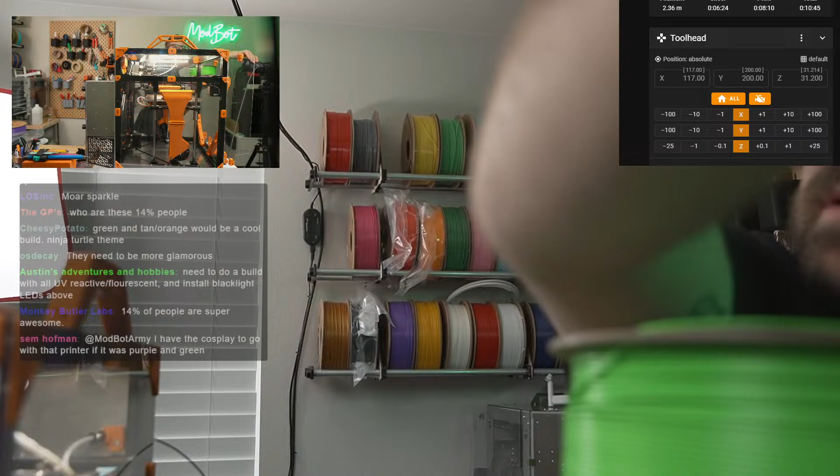Okay, I know what we're gonna do. This is the final one. So the 2 options are gonna be: these are not sparkle, so we'll do 2 not sparkle as 1, right, for Joker colors. I need an assistant. There we go. Okay, so this is one option. This is just not just because it's awesome, but it's a neon green and a standard purple, and it's sort of Joker-y colors. Okay, so there's one option.

And the second option is sparkle teal and sparkle blue. Okay, so we'll do a versus between, we'll call it Joker and Sparkle, and see which wins out of those 2.

It's gonna be, I know it's gonna be Sparkle, isn't it? Joker's overdone. I've never, I don't know if I've seen a Joker build. Okay, Sparkle won this one.

It's just so many polls. Okay.

Purple on the bottom only is Hulk. Okay, we can call it Joker or Hulk. Joker or Hulk. Sparkle.

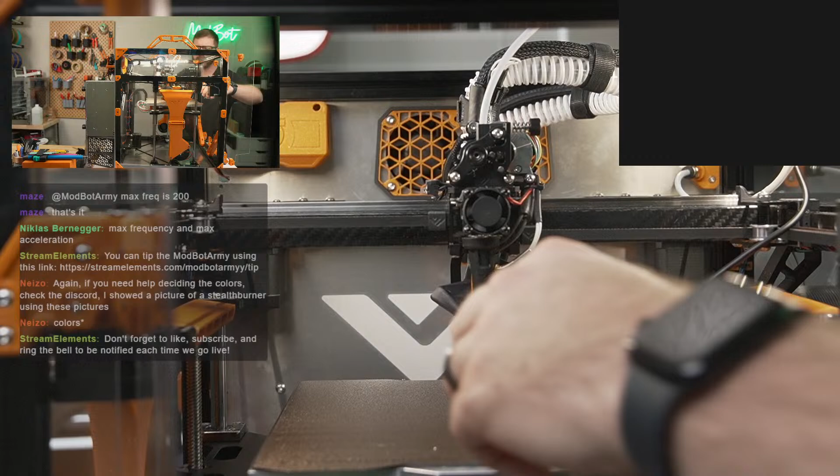The thing that kind of sucks is I'm running the Micro Swiss, I can't remember, it's C2. It's a really nice nozzle, but I think it's a little bit wider on the end than most nozzles, and so it's a little bit tricky to get this on here.

Polymaker Galaxy, yes. So the colors for the Enderwire will be Galaxy Purple and Galaxy Teal. Let me turn this off. We don't need... but this is to decide the primary versus accent.

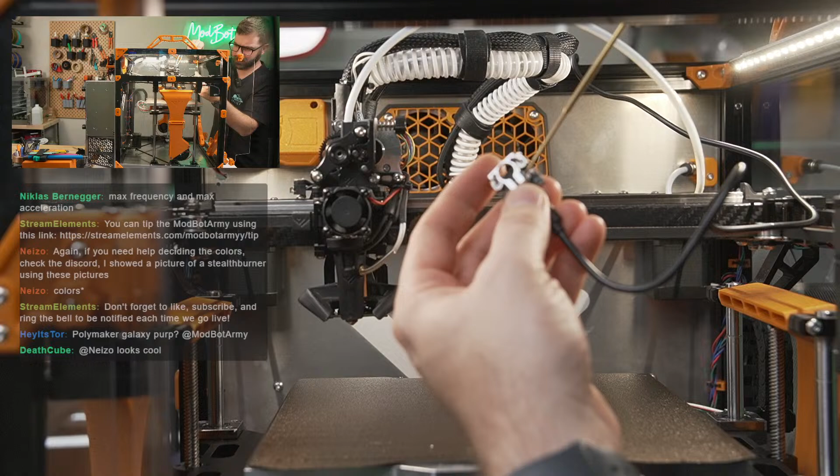So let me loosen this fully. I remember it was kind of a pain in the butt to get this on the first time, and it was throwing an error, like, let me see. Okay, that feels... oh, there we go, there we go. Okay, so that's on.

And we will fasten the set screw. I just know that last time when I tightened it a hair too tight, it freaked out on me, so let's... that's on there pretty damn tight. I don't think we need to go any tighter than that.

Oh wow, blue is coming up, or teal. Okay, so I'm gonna plug this into the Pi. Actually, I'm gonna power it off just to be safe. Yeah, I'm gonna power it off. Plugging it into the Pi, powering it back on.

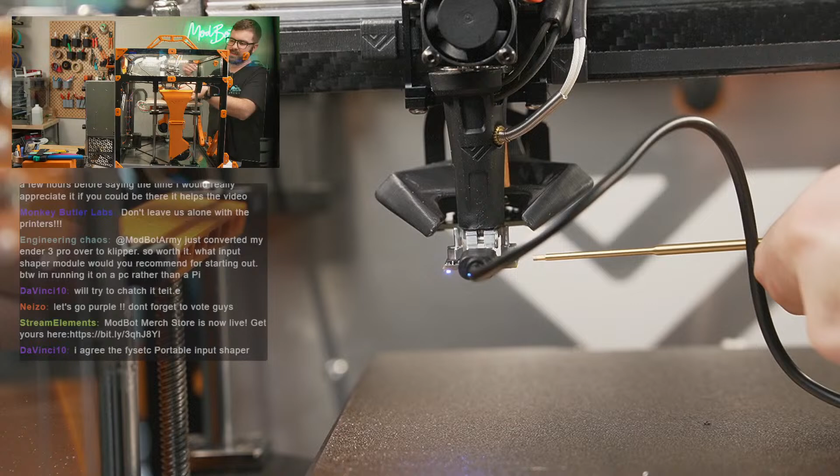Okay, so yeah, the issue here, let me see if I wiggle it. No, it's tight. Yeah, I like this nozzle board, however I don't like that it seems really sensitive. Let me loosen it a hair. Let's see if that fixes it.

Make sure I've got it plugged in. Yep, it's plugged in, it's lit up, so it should be fine. If it doesn't detect again, what I'll probably do is take it off the nozzle and make sure that it's actually connecting, but let's see. Oh wait, no, I shouldn't need that. That's if we're using... yeah, we shouldn't need that.

Okay, so yeah, it definitely doesn't look like it's connecting, and I think it's because of this MCU. So let's see if I wiggle it. I believe it's just because it's got a little too much stress being put on. Let's see if I loosen that up. Let me pull it off completely.

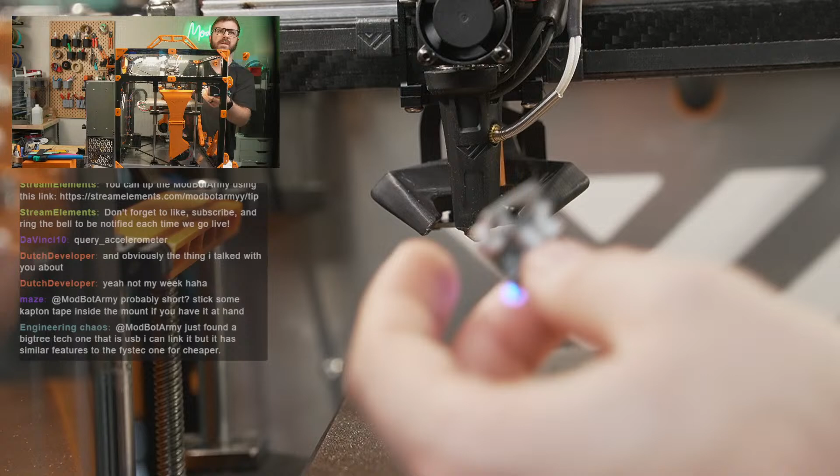I really wish. Stick some Kapton tape inside the mount. Oh, you think that it's actually the nozzle? You think it's a short? Yeah, I'll shove some Kapton tape basically as a barrier. I don't really have super thin Kapton tape, but let's just see if I put some in. Maybe it's the nozzle touching something. I think it's the stress of the nozzle spreading the prongs on it, but we'll see. Let's give this a go.

Let's see if I just shove it in. I might need to cut this down a little bit more.

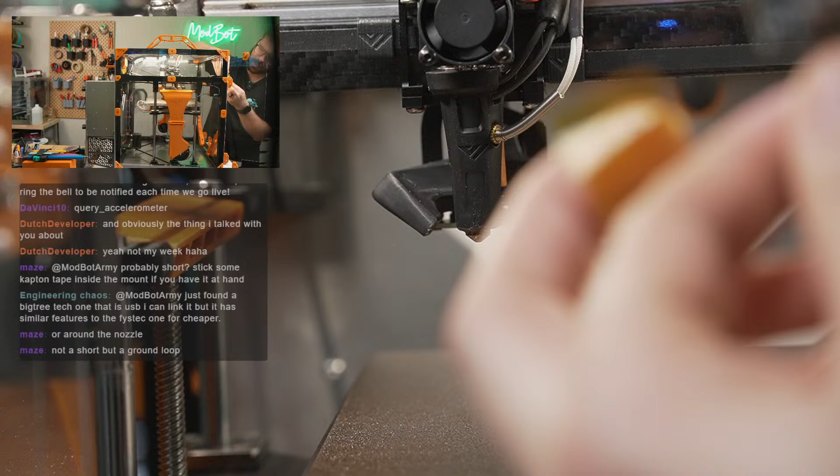Oh yeah, Bambu updated their printers again. I did see that, I haven't updated mine yet, but I saw that they basically ported their... I saw they ported the stepper motor silencing thing over to, I think, the X1 series, and it's coming to the P1 series.

Okay, so now there should be no way for the nozzle to be touching anything down there. Okay, let's see if we're able to connect.

Yeah, it looks like it's still an issue. I'm looking at it, and the nozzle is nowhere near the board. It's got pretty heavy stretching. I think it's the actual mounting bracket itself that's doing it.

Yeah, it sucks. So my next option is I got the other nozzle mounting one. If I remove the nozzle, we can shove it on there, because there's no other real mounting point. The mounting bracket is shorting the thing on the PCB. It's because the second I remove it, it's fine.

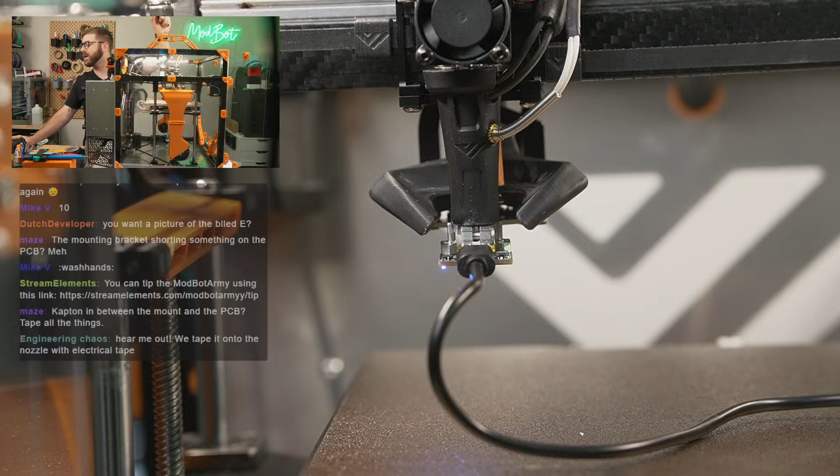I want to rock a 0.6. I guess if we swap nozzles to, like, say a 0.4, so we can do this testing, and then swap back to a 0.6, it won't have any effect on it.

Yeah, this isn't gonna work though. It's never just straightforward. Let's see. I do have some, I just don't want to run anything smaller than a 0.6 on this VZ. The flow it's got and everything, it just doesn't work.

Let me see if I can find this really quick. I think I threw it in here somewhere. Let's see, we've got CAN bus parts, regular ADXLs, we've got the LDO ADXL. It's weird, I'm not seeing the one that I need. Could it be in here? Nope.

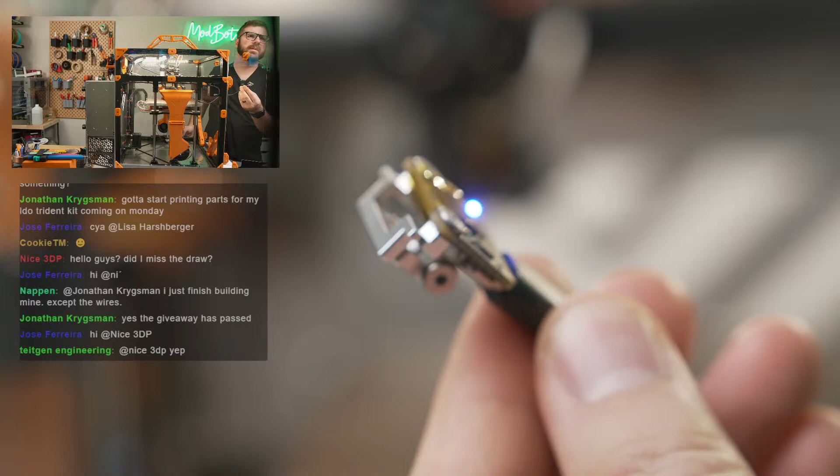Well, the nozzle on here is an awesome nozzle, a 0.6. I love the nozzle. It's the size on it with this little adapter.

So yeah, this is what's going on with this guy. Like right now that it's off, it'll boot right up, I'm sure of it. Again, we checked earlier, but let's see if I go firmware restart.

Take off the metal bracket and mount it to the hot end fan. The hot end fan is higher up, and it's using, if I remember correctly when we built this, self-tapping screws. This is actually interesting though, because it's not working now, and I don't have it on there. Let me see if I squeeze this. So it might just be dying on me.

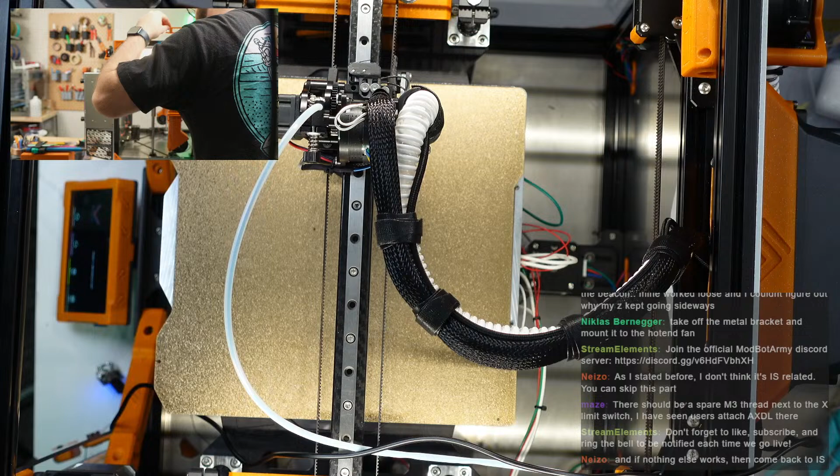There should be a spare M3 thread next to the X limit switch. I've seen users attach an ADXL there, next to the X limit switch. Let's see if I see it. Let me go overhead. Ah, there is. It's pretty tucked back in there though.

That's frustrating. Hey, Tron.

If nothing else works, then come back to input shaping. Get a beacon, I need a beacon too. I might have to reach out and say, hey, I need a beacon too, because boy, it would be convenient, especially with the kind of troubleshooting we're doing, just to have the ADXL permanently mounted down there.

I almost wonder if I can just take off this screw on the tool head and use it here. I have to find the ADXLs. I don't actually know where the other ones are right now, so I might do some digging.

Let me disconnect this one time. But you know what, could it be? Hold on, I wonder if it's the USB port that's doing it. Okay, this bracket is sitting right on top of the USB-C port. I'm wondering if that's potentially what's doing it.

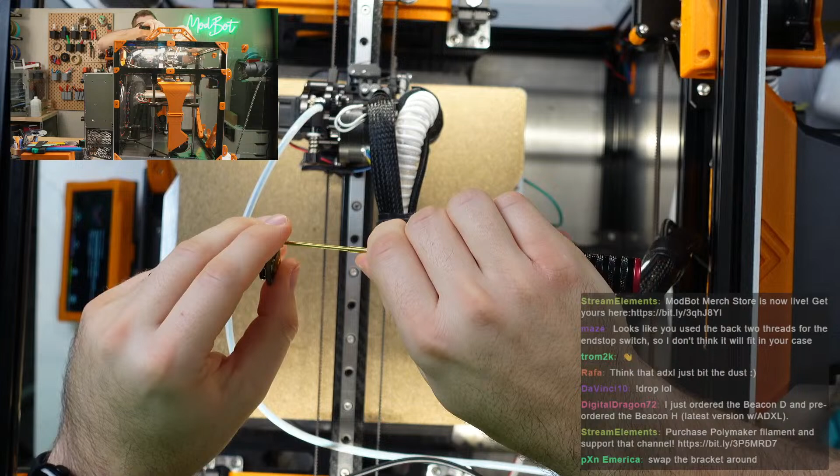If it's still happening, then that tells me I'm incorrect, but I linked a new input shaper you could maybe use in the future if you need it. It has a nozzle mount as well.

Okay sweet, I have one, a nozzle mount one somewhere. I did a video on it a while back, I just don't know where it's at. The thing I like about this nozzle mount is that the clamping setup they have on here is cool, if it actually works. One second here.

Because the other one that I've got requires you to remove the nozzle, which is fine, it's just not nearly as quick of a process when you want to test something out. If this works, I'll be super happy.

Okay, tightening down. Okay, so now it is nowhere near.

Yeah, I have one of those as well. I mean, they're fine, they're great, it's just again an extra step. Well, this has got the bracket, so you should be able to just put it on. But yeah, now it's nowhere near that USB-C housing. So hopefully, if that's the issue, this will have solved it.

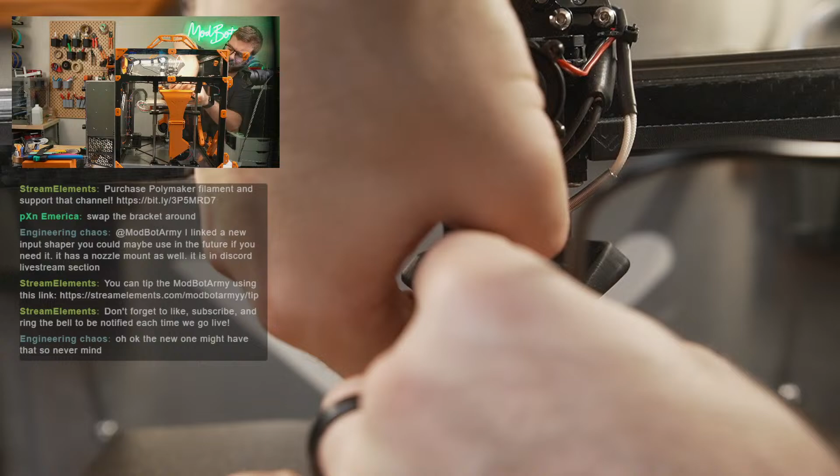Okay, will this work? Doesn't seem like it. It doesn't seem like it. Yeah, it's pretty annoying.

Well, I might just have to dig out the one that requires me to remove the nozzle and run the test. Maybe, well, I guess you're not supposed to heat the nozzle with it on too, so I was going to say maybe I'll leave it on. It is.

Have you swapped USB cables? I have, yeah, this isn't the same USB cable that I've used previously, but I can do it again. I mean, we're here, so let's rule that out, I suppose. Just another, there we go, the USB-C cable on the ground. It's definitely a beefier cable.